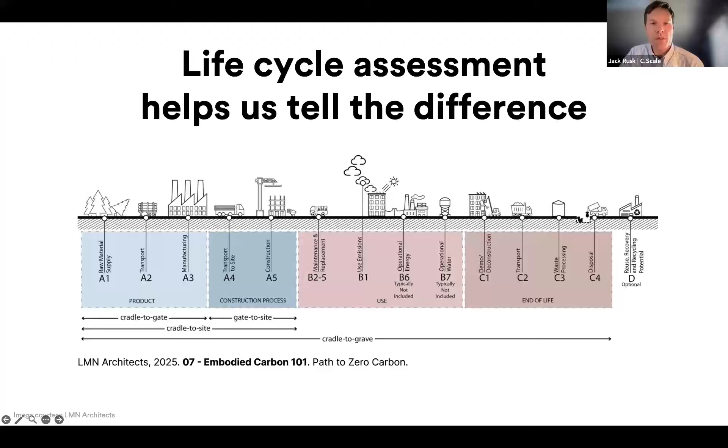When we think about these things, especially in the present moment, one statistic that buoys my heart is that designers have purchasing power something like two orders of magnitude more than the average consumer. There are things we should be doing as individuals, and things we should be doing as a society, and still the decisions we make on these projects every day are shifting procurement patterns globally. So how do we use that positively?

There's been a lot of talk recently about policy that would regulate or require life cycle assessment. There's been obvious headwinds at the federal level—things like the federal Buy Clean initiatives and the GSA's P100 decarbonization facility guidelines that had a big focus on decarbonization have been rolled back at this point.

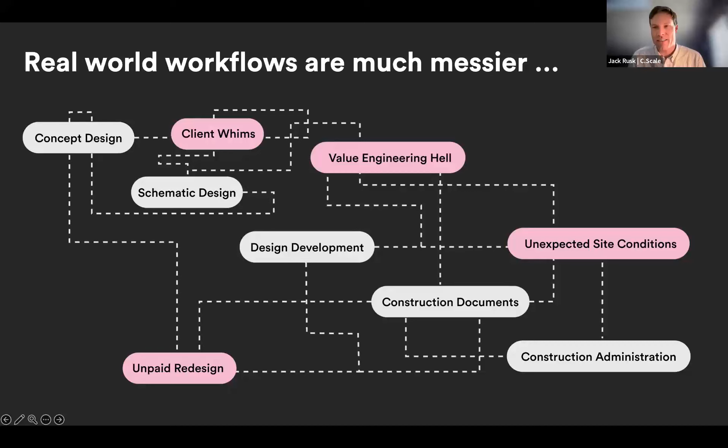Our goal is to build design tools that facilitate a process that works more like this, that's much messier, where you might have a lot of resolution around a certain aspect of the design, but no resolution on the other. Even when we get to as-built, there's often the idea that then we finally have the source of truth for the building. I think people who have reviewed or done as-built LCA know that there's still a lot of interpolation that needs to happen to understand parts of that.

So how do we build processes and tools that allow us to work at different levels of resolution for different building systems? This is really crucially, I think, something we are moving towards in C.Scale as we, through the course of 2025, make good on the process we've started at the beginning of this year, after the spin out from EHDD and some external investment.

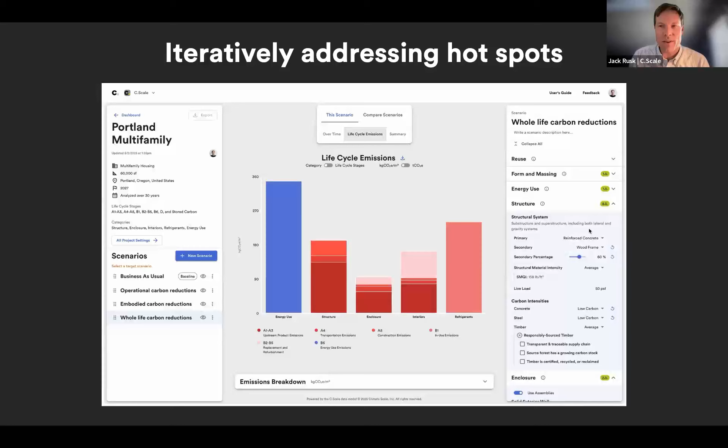We're excited to build tools and visualizations to help people make decisions. This is a really brief screen recording showing how changing the massing can have an emissions difference, or that changing, say, from a reinforced concrete to a podium building might have some effect, changing the interiors, but using these data visualizations to help people see and address hotspots iteratively.

So rather than an approach where you have to do all the design and then come back to make the decision, trying to close that iterative loop to really be able to quickly test what-if scenarios, to understand the decisions that matter most.

In another example, one thing we're really excited about is these time series planning tools, which I think is important for projects when you understand the whole life carbon perspective, but also for owners and portfolio managers who are planning many projects over longer lengths of time.

This is a retrofit project that we were helping a client look at recently in Atlanta, and it's really exciting to me to help designers understand where these crossing points are between different scenarios, how to understand the mix of reuse that is most impactful, and what the carbon payback period is for a certain upfront design.

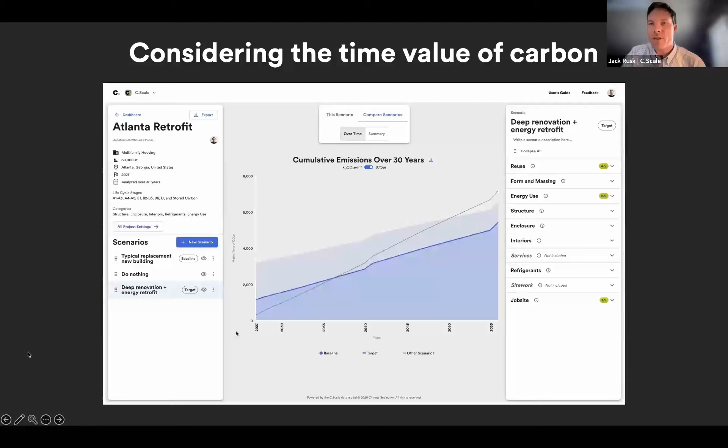In addition to the work that we do within our tool, which I can give a brief demo of in a moment, we're also really excited to be working with Autodesk Forma. They have a small part of the C.Scale model embedded in the Forma tool. I think we get asks, dare I say, every week for us to develop a 3D design tool.

Developing 3D design tools, maybe some people on this call have tried - it's hard, y'all. And rather than spending our resources building the next geometry kernel, it's been really exciting to focus with people who are really, really good at that, and leverage some part of our models and data to help a much wider set of folks come to the table. That gets back to the why of this work for us, which is getting these tools into everybody's hands everywhere.

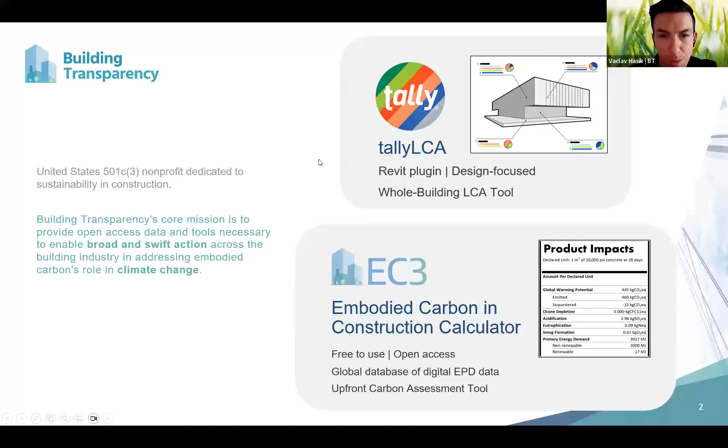And we've recently had some challenges with one of our major funders. So you'll see some of the stuff I'm presenting today, some updated timelines and some of the updates to EC3 and Tally, as a result of some of the changes to funding.

And it's just the landscape that we are in today. So just one kind of background note on everything.

In terms of our tools again, Tally—if you're not familiar, this is new, otherwise this is more of a 101.

Tally is really focused on the later design stages, and then EC3 is focused on the construction or as-built phases. It can also be used during design, but it's really initially built with contractors in mind.

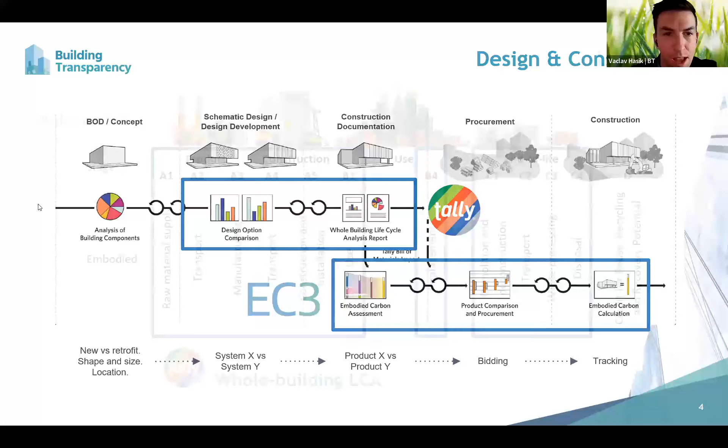Tally has been used in the conceptual and planning phases before, but it really isn't built for that. And so it's really great to see tools like Jack's that fill that void in the design and construction process. A couple more 101 slides, and then I'll get to the updates.

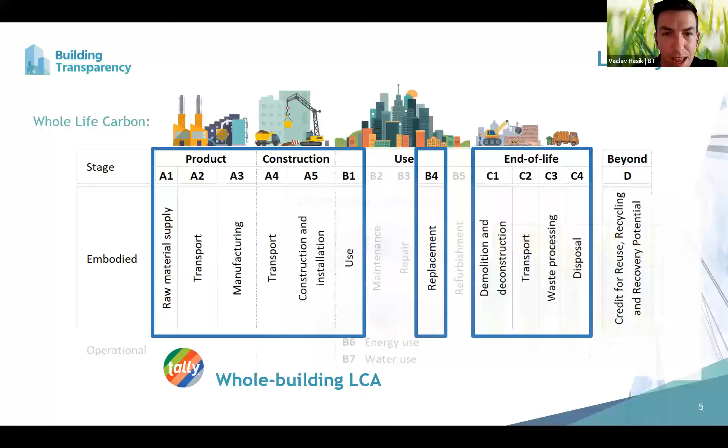Tally LCA is a whole building LCA tool, so it includes all life cycle stages. It's really focused on making systematic design changes to your building, including evaluating different types of envelope systems for entire sections of a building.

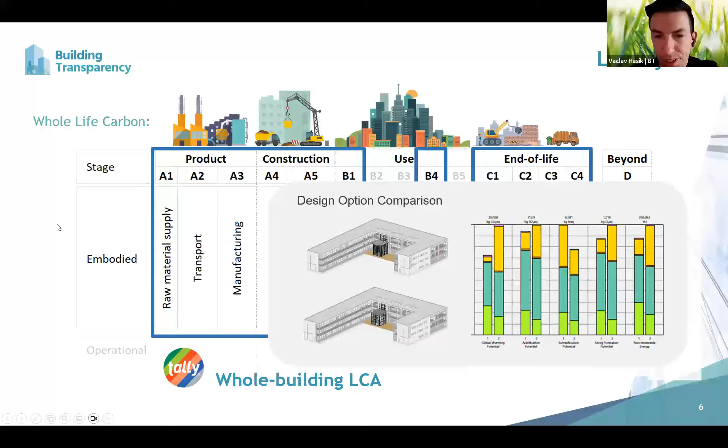Sometimes swapping out different material types, but in its current state it's not really great at comparing different supply options or manufacturer options for the same type of material. That's really where the EC3 tool comes into play and excels.

It focuses on extracting environmental impact data for the A1 to A3 stages specifically.

We do have some data for the other stages as well, but we take all of this from environmental product declarations, where really the A1 to A3 data is the most useful part of that document. It allows you to know exactly what that specific manufacturer's impact actually is for that product.

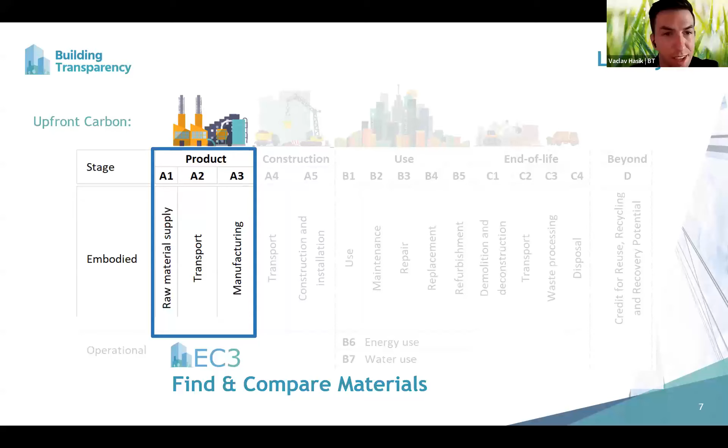As I mentioned, we also have the plan and compare buildings feature in EC3, which also allows you to assess the transportation from the manufacturer to the project site.

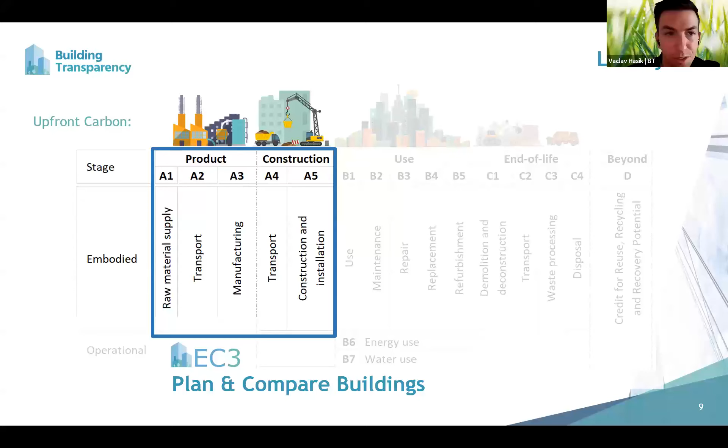And then if you have data on construction and installation resource use, then you can also include A5 in there. With that, I'll switch to some of the updates that we have.

This is hopefully some of the more interesting stuff for most of the folks on the call. We'll start with EC3, and these are some of my older slides actually from earlier this year before we had to kind of reshuffle our timelines.

But we did some significant prep and research into our user interface updates, and specifically around actually making it 508 compliant.

So this is essentially the accessible user interface that's required for any tools used by any federal agencies.

We've also had some category updates in our queue, specifically the CMU and masonry grout updates. With that, we basically update some of the filtering mechanisms, clean up the data, and then release it publicly.

As you may know, there are certain public categories in EC3 and then others that are still in pilot. Those pilot ones are essentially the ones that we always need more resources to curate and improve the searching mechanism.

And to ensure that when people use EC3, they are actually mostly comparing comparable products, right, that do the same job.

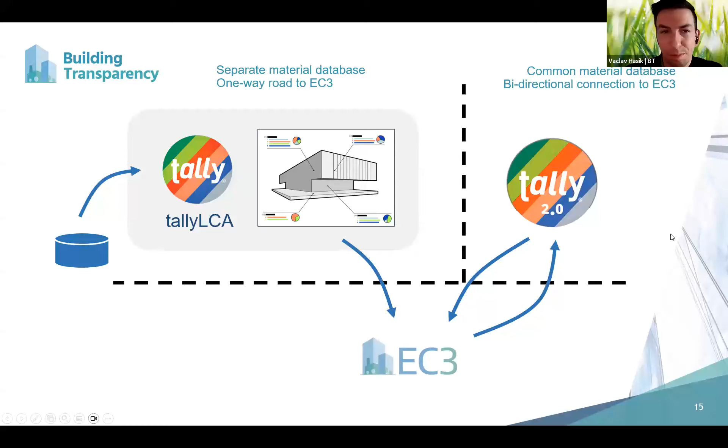Some of the other updates planned specifically for Tally 2.0 include better communication between EC3 and Tally. Currently, you can create your Tally LCA model and push the quantities to EC3, and that's pretty much it—there's no bidirectional communication. Also, it's really hard to push EC3 environmental product declaration data into the Tally library currently. So we're making major changes to how that works with Tally 2.0, with much better bidirectional communication, so EPD data you see in EC3 will be much easier to get into Tally 2.0, making it faster and easier to keep the impact library up to date.

With that, we did still make some changes to the environmental impact data in Tally 1.0, at the end of last year, specifically around some of the main materials everyone's using, where we were using older EPD data. So we've updated some of the wood product data with the latest industry-wide EPDs, and also some of the steel, cement, and XPS insulation data, because we knew there were some major changes in the impacts from those environmental product declarations.

Some of the major changes, besides the integration of data from EC3, is completely restructuring how the end-of-life models, or end-of-life impact estimates, work. Before, all of the end-of-life impacts were built into the environmental impact library from the get-go, directly tied to each of the material types in the Tally library. What we're doing with this restructuring is decoupling the impacts of individual end-of-life paths, or fates.

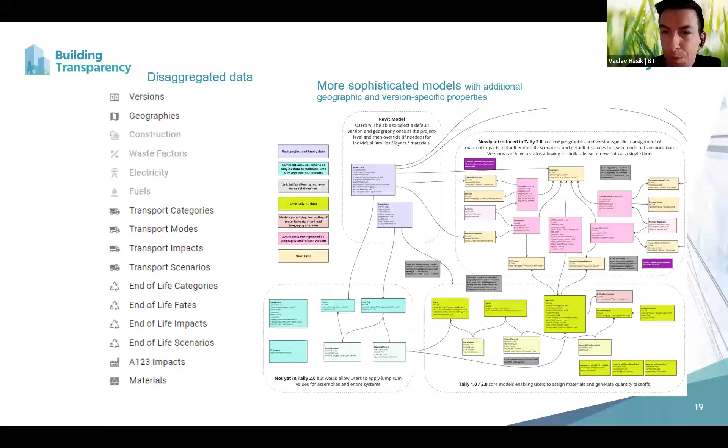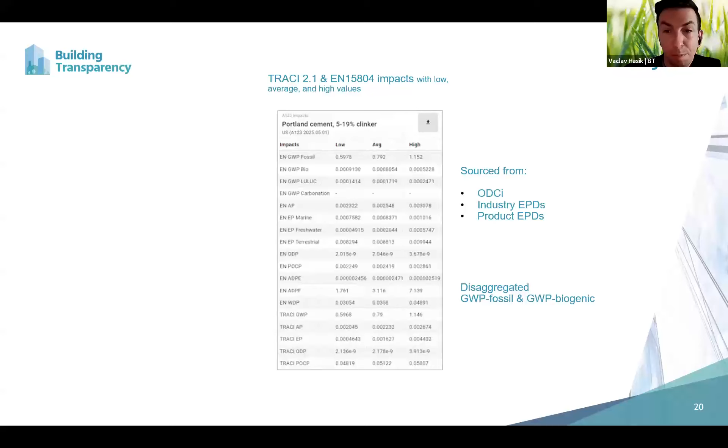Here's an example of the specific changes to the global warming potential and other environmental impact category structure within the tool. As you can see, the one other thing I didn't note was that we're also including TRACI as well as EN-based environmental impact categories in the tool. This will allow us to serve better not just the North American market, but potentially add more data points for European and other markets that may use a different set of environmental impact indicators.

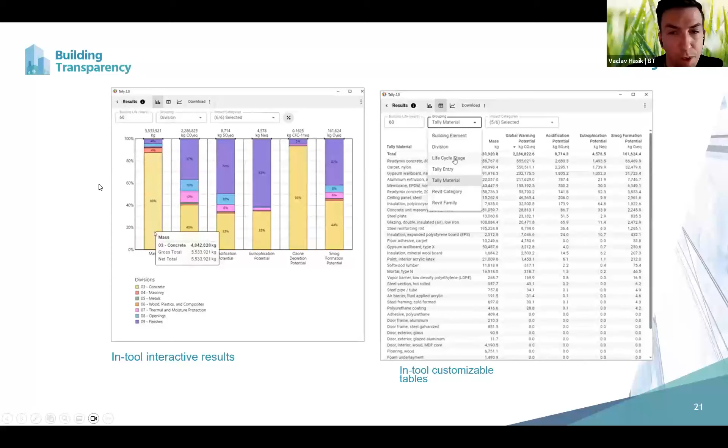There's also going to be various export options of the results. So you will still be able to export the results into Excel files. We know a lot of people use their own company-wide portfolio management and visualization tools that were relying on those Excel reports, so that's still going to be an option.

We also are going to have an option of exporting a JSON file. So for anyone that's developing internal tools within a company, you will also be able to use a more developer-friendly format as well. And there are some additional changes to the structure of the data.

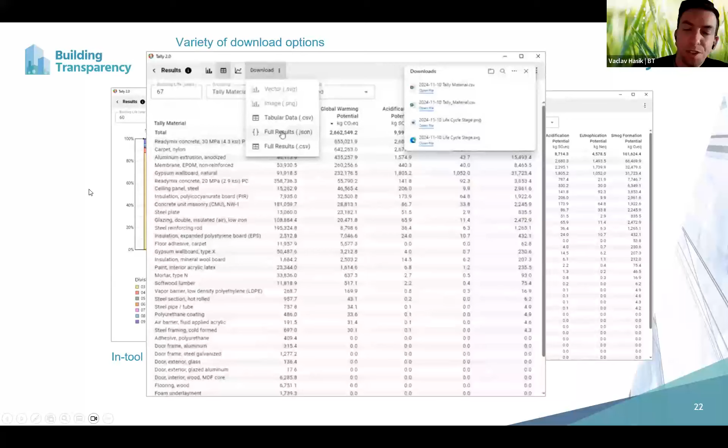Especially around the project level information, we're now aligning with some of the standard naming and description protocols developed as part of the ECHO project, which is the Embodied Carbon Harmonization and Optimization project that you may have heard of. So hopefully reporting to various certification programs and other things will become a little bit easier.

I think this is one of the last slides. So in terms of design option comparisons that you may be familiar with, we still have that feature, but we've added a couple more improvements.

You will be able to do the design option comparison, but also include the rest of the building that you may not necessarily have modeled as a design option in Revit. I think that's a big improvement. You really get the context of the changes, not just within what is changing within your particular design options, but you get the context relative to the entire building.

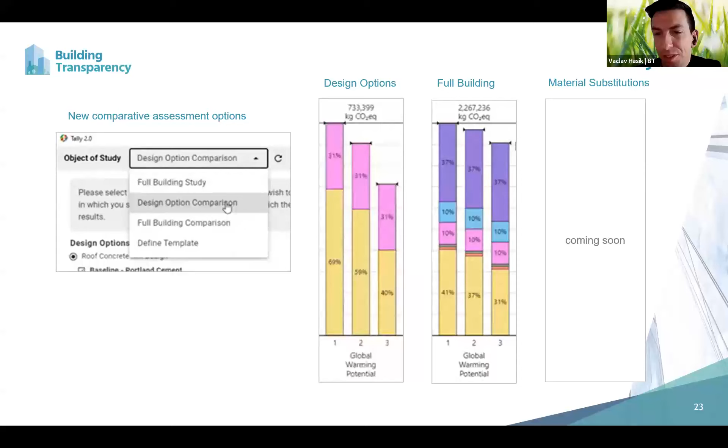We're also, I don't have any screenshots for the material substitutions, but we are implementing some improvements where it's easier just to substitute a material within a certain element. You don't have to actually then model it as a design option, which is basically unnecessary for you to remodel a portion of a building just to swap a material type. So we're trying to make that a little bit easier.

Other improvements are in terms of covering adaptive reuse projects or reuse of elements in general. There is now going to be a native comparison feature for if you're working on an adaptive reuse project and you've marked a bunch of components as reused or refurbished. Then you don't actually have to generate two separate results reports. You will be able to simply click a button and get that comparison of an adaptive reuse versus as-new project of the same exact type and geometry directly within the tool.

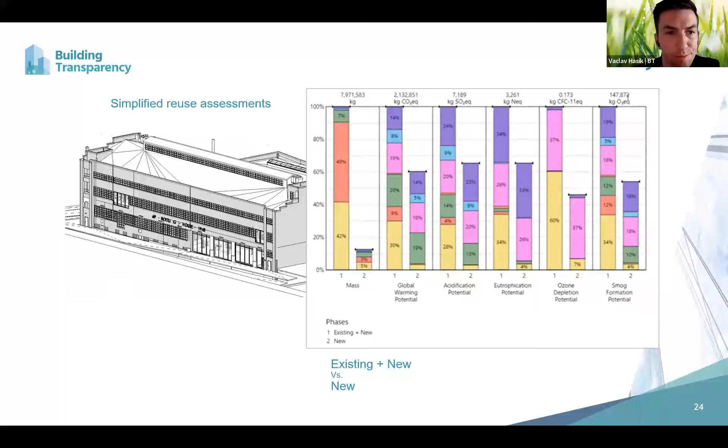I think this is the last slide. Just some minor, or they may seem like minor, improvements to the usability of the element browser. In the past, if you wanted to copy definitions or apply them across multiple different elements, the copy process wasn't as intuitive and as straightforward as you would expect from any other tool you're using. So we've made some changes so it better aligns to the typical convention that you might see.

So you'll be able to click on an element and click Control-C for copy, and then paste it the same way onto other elements. You don't have to go through that Tally-specific process of copying definitions.

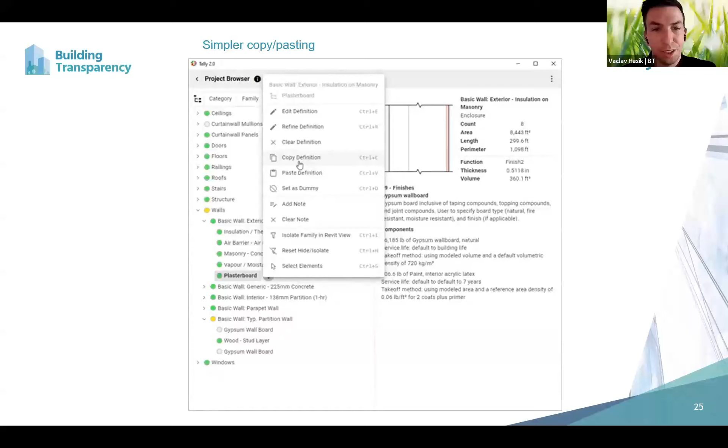The other small improvement here is that you will also be able to assign or define the building elements classification directly within the element browser. In the past, there was this chart where you could see contribution by building elements in the Tally report, but a lot of people were always struggling to understand how you actually get the elements assigned to some of these systems.

You had to go back into the Revit model and assign the assembly code to the right UniFormat code, essentially. Instead of doing that, you will be able to actually define what the UniFormat classification system assignment to that element is directly within the plugin in Tally 2.0.